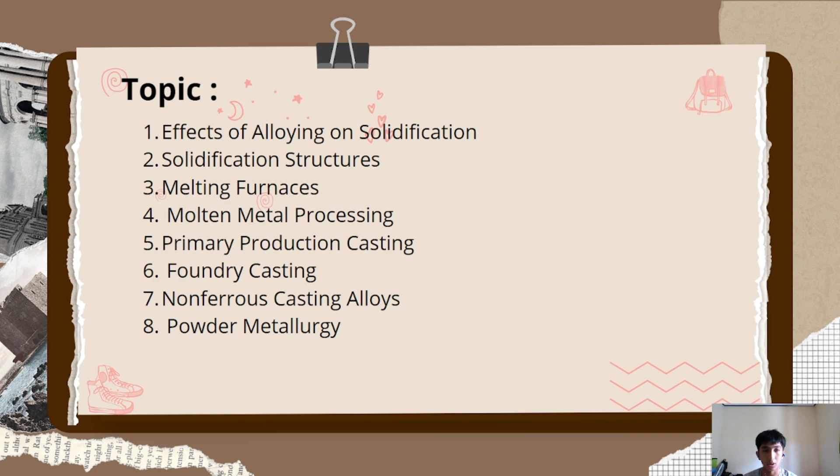Topics: first, effects of alloying on solidification; two, solidification structure; three, melting furnace; four, molten metal processing; five, primary production casting; six, foundry casting; seven, non-ferrous casting alloys; and eight, powder metallurgy.

The manufacture of modern alloys is accomplished using a wide variety of melting, casting, and fabrication techniques. The selection of a specific manufacturing process depends on the alloy system under consideration, the form of the product to be manufactured, the condition in which it must be provided, and the properties it must possess in order to be used effectively in the intended application.

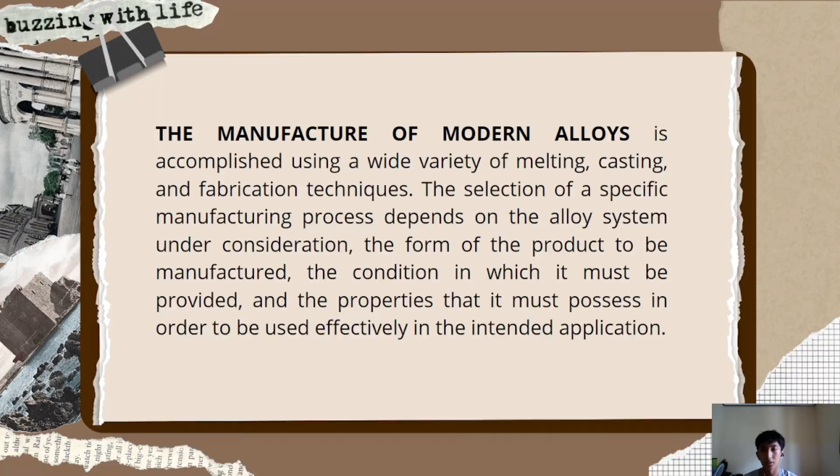Effects of alloying on solidification. Solidification of pure metals: when a pure metal begins to melt, the solid-liquid mixture stays at the melting point temperature until all of the solid has completely melted. The amount of thermal energy needed to complete the transformation from solid to liquid is defined by the latent heat of fusion of the material.

A slightly different cooling curve can be observed when the molten metal includes some minute solid impurities, such as particles of dust or small pieces of the refractory brick used to line the interior of the melt furnace. These impurities promote solidification by serving as nucleation sites such that free moving atoms can anchor themselves onto the impurities. Therefore, only some undercooling or supercooling might occur when the melt includes such impurities.

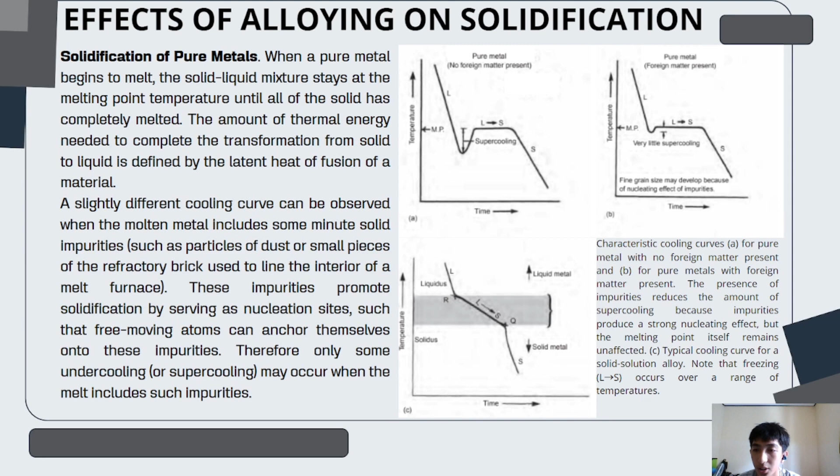Characteristic cooling curves: A for the metal with no foreign material present, and B for pure metal with foreign material present. The presence of impurities should reduce the amount of supercooling because impurities produce a strong nucleating effect, but the melting point itself remains unaffected. C is a typical cooling curve for a solid-solution alloy, noting the freezing occurs across a range of temperatures.

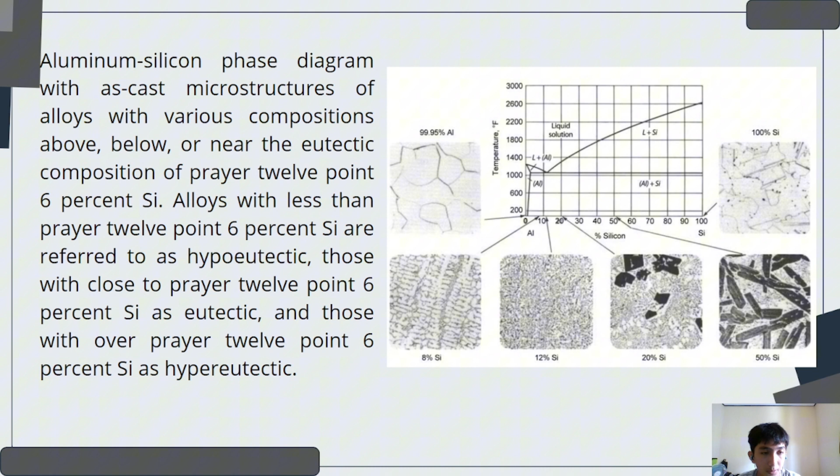Aluminum silicon phase diagram with microstructure of alloys with various compositions above, below, and near the eutectic composition of approximately 12.6% Si. Alloys with less than approximately 12.6% Si are referred to as hypoeutectic, those close to approximately 12.6% Si as eutectic, and those with over approximately 12.6% Si as hypereutectic.

This is a particularly important consideration in aluminum silicon alloys, which have been used for decades in the automotive industry for casting engine blocks. Aluminum silicon alloys are used in this application primarily to reduce overall weight and to improve fuel economy. The freezing range is strongly dependent on the silicon concentration in this alloy.

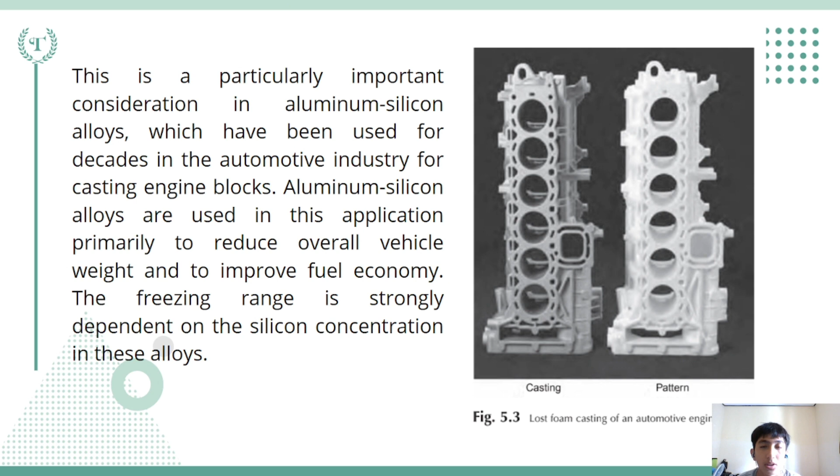Next is solidification structure. The solid-liquid interface during solidification normally exhibits one of three types of crystal growth in the liquid: planar, cellular, or dendritic growth, as shown in the picture.

Dendritic growth is a further manifestation of cellular growth in which the spikes develop side protrusions at still higher undercooling and high growth velocities. The cells grow into rapidly advancing projections, sometimes of complex geometry, as shown in the picture of the effect of undercooling on solidification structure.

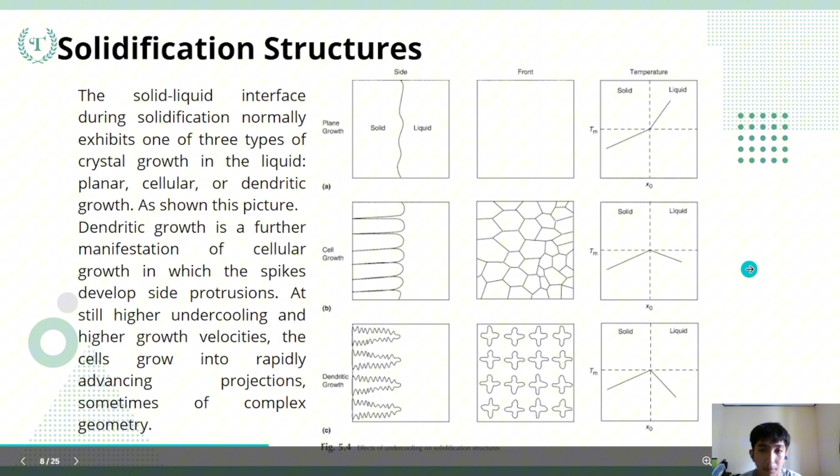Thermal supercooling, cellular growth, as illustrated in the picture, occurs when the advancing planar solid-liquid interface becomes unstable and a small spike appears on the interface that then grows into a cellular type structure. The planar surface becomes unstable because any part of the interface that grows ahead of the remainder enters a region in the liquid that is at a lower temperature.

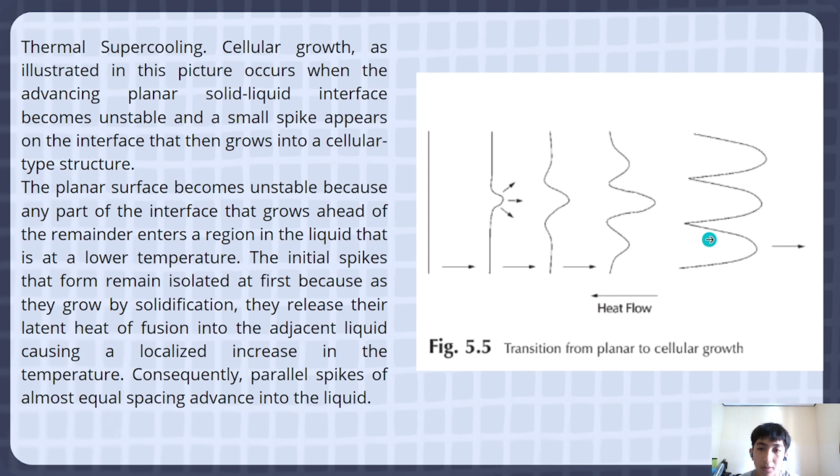The initial spikes that form remain discrete at first because they grow by solidification. They release their latent heat of fusion into the adjacent liquid, causing a localized increase in temperature. Consequently, parallel spikes of almost equal spacing advance into the liquid, as shown in the picture of the transition from planar to cellular growth.

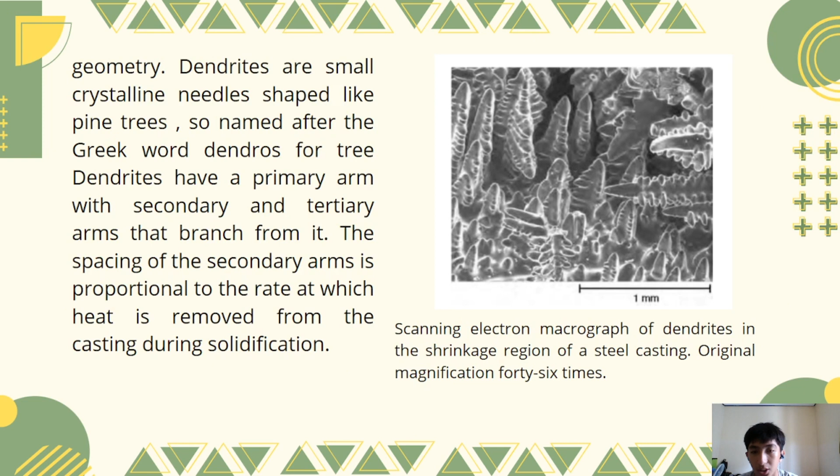As shown in the picture, a scanning electron macrograph of dendrites in the shrinkage region of a steel casting, with original magnification 46 times.

Solidification zones. Metal cast into a mold can have up to 2 or 3 distinct zones, or types of grain growth. A chill zone, a zone containing columnar grains, and a center equiaxed grain zone. However, it should be noted that all three zones do not always occur, as shown in the picture: a chill zone, a zone containing columnar grains, and a center equiaxed grain zone.

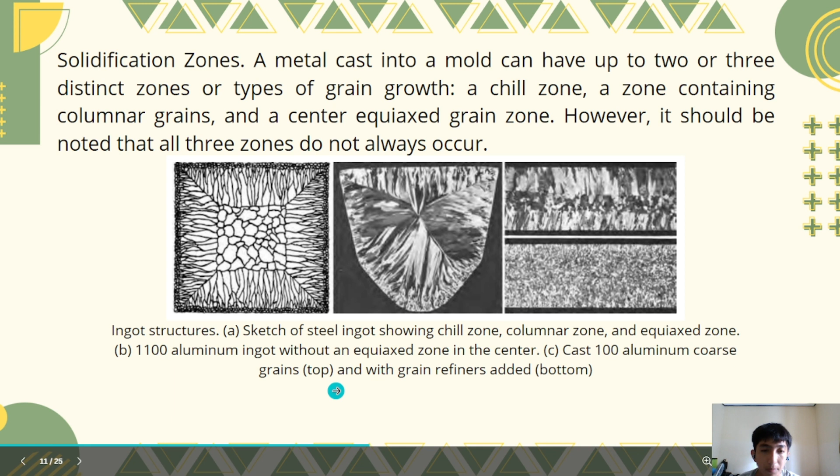Ingot structures. A is a sketch of a steel ingot showing chill zone, columnar zone, and equiaxed zone. B is 1100 aluminum ingot without an equiaxed zone in the center. C is cast 1100 aluminum, coarse grains at top and with grain refiners at the bottom.

Melting furnace. Melting furnaces are industrial devices used to melt various materials such as metals, glass, or ceramics for casting, molding, or other manufacturing processes. The furnaces are crucial in industries like foundries, metalworking, glassmaking, and ceramics production. They come in various types and configurations depending on the specific requirements of the materials being melted and the production process. Here are some common types of melting furnaces.

The first is the electric arc furnace, where the furnace uses electric arcs to generate heat, melting scrap metal or other materials. They are commonly used in steel making and can achieve high temperatures quickly.

They are commonly used in steel making and can achieve high temperatures quickly. Induction furnaces use electromagnetic induction to heat and melt metals. They are efficient and commonly used for melting ferrous and non-ferrous metals like iron, steel, aluminum, and copper.

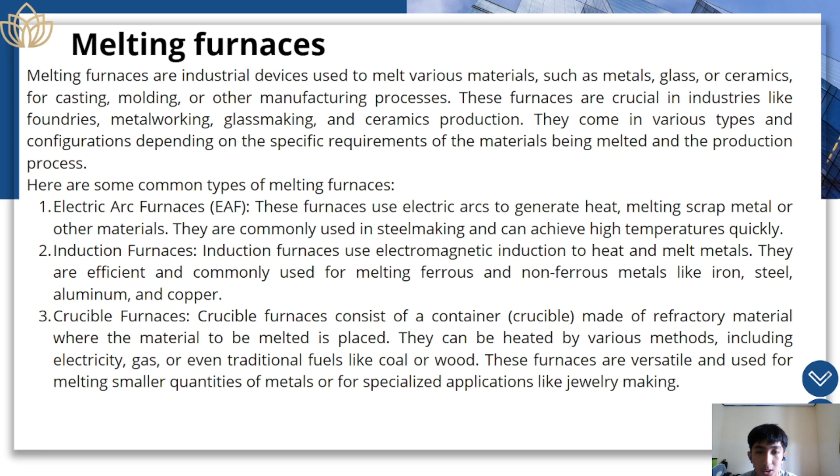Crucible furnace. A crucible furnace consists of a container or crucible made of refractory material where the material to be melted is placed. They can be heated by various methods, including electricity, gas, or even traditional fuels like coal or wood. These furnaces are used for melting smaller quantities of metals or for specialized applications like jewelry making.

Cupola furnace. Cupola furnaces are used primarily in foundries for melting iron. They work by burning coke, a type of coal, to produce heat, which melts the iron and other additives.

Blast furnace. Blast furnaces are vertical furnaces used primarily for smelting iron ore to produce pig iron, which is then further processed into steel. They operate by continuously feeding iron ore, coke, and limestone into the top of the furnace where a blast of hot air is blown in from the bottom.

Gas furnace. Gas furnaces use natural gas or propane as a fuel source to generate heat for melting metals. They are commonly used in small-scale operations or where electricity is not readily available.

Oil-fired furnace. Oil-fired furnaces use oil as a heat source for melting metals. They are less common than electric or gas furnaces but can be used in situations where other fuel sources are preferred or more readily available. The choice of a melting furnace depends on factors such as the type and quantity of material to be melted, energy efficiency requirements, cost considerations, and environmental regulations.

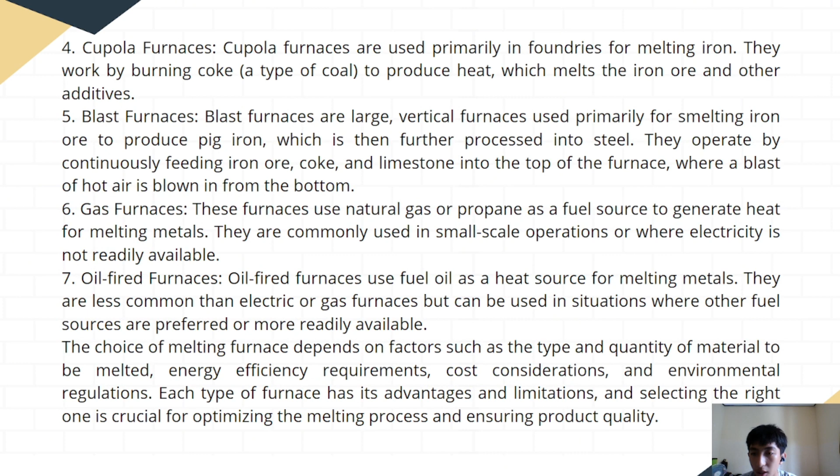Each type of furnace has its advantages and limits, and selecting the right one is crucial for optimizing the melting process and assuring product quality.

Molten metal processing. Molten metal is processed and handled in various ways depending on the alloys and melting practices that are used. Melting is a basic way of combining elements for the purpose of alloying, and the overall chemical composition of the molten alloy must be carefully controlled and processed before casting can take place.

Fluxing. Fluxing of molten metal is often the first step in obtaining a clean melt. Fluxing is a term commonly used in foundries and melting departments that refers to molten metal treatments from the addition of reactive chemical compounds or inert gases.

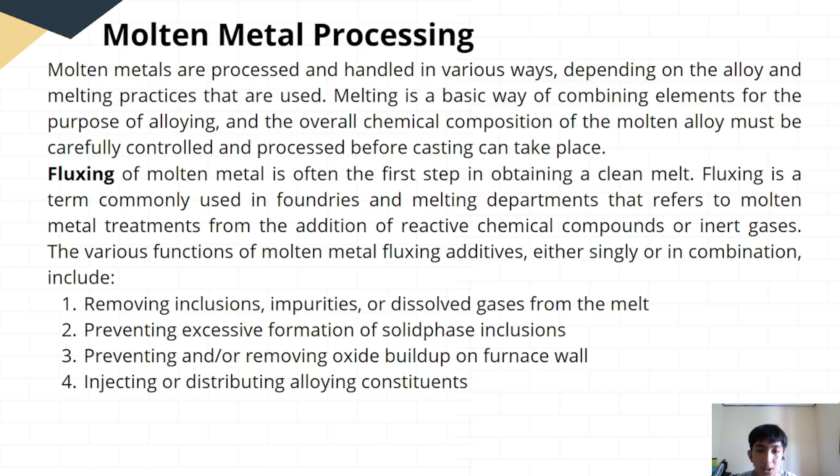The various functions of molten metal fluxing additives, either singly or in combination, include: first, removing inclusion impurities or dissolved gases from the melt; second, preventing excessive formation of solid phase inclusions; third, preventing or removing oxide buildup on furnace walls; and fourth, injecting or distributing alloy constituents.

The type of flux depends on the composition of the melt. In brass, bronze, and iron and steel making, for example, the function of fluxing is twofold: first, to render the high-melting refractory oxide impurities fusible and separable from the molten metal, and second, to provide a medium with which the impurity elements or compounds will combine in preference to the metal.

In particular, fluxing is used extensively in controlling dross formation and removing oxide from aluminum melts in melting furnaces. The basic types of aluminum fluxes are: first, cover fluxes, designed to produce a barrier or blanket on the surface of molten aluminum.

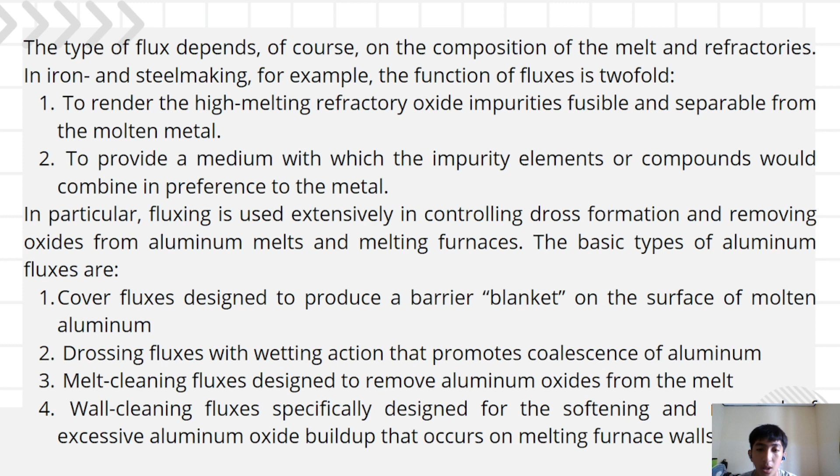Second, drossing fluxes with a wetting action that promotes coalescence of aluminum. Third, melt cleaning fluxes designed to remove aluminum oxides from the melt. And fourth, wall cleaning fluxes specifically designed for the softening and removal of excessive aluminum oxide buildup and crust on melting furnace walls.

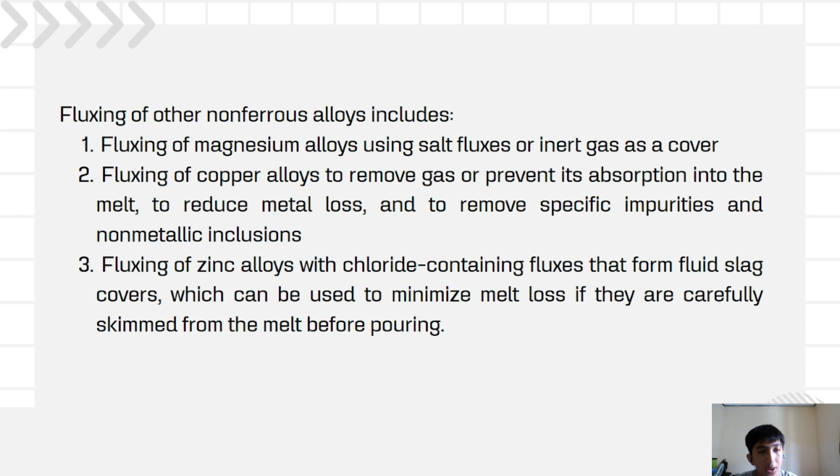Fluxing of other non-ferrous alloys includes: first, fluxing of magnesium alloys using salt fluxes or inert gas as a cover; second, fluxing of copper alloys to remove gas or prevent its absorption into the melt, to reduce metal loss, and to remove specific impurities and non-metallic inclusions; third, fluxing zinc alloys, which use chloride-containing fluxes that form fluid covers, which can be used to minimize melt loss if they are carefully skimmed from the melt before pouring.

Primary production casting. Foundries also require the use of ingots that can be remelted, sometimes called pig ingots, to provide specification-compliant composition. Other defects that may form in an ingot during casting and solidification that could result in cracking during forging, rolling, or extruding include metallic impurities, non-metallic impurities, slag, dross, and flux inclusions, inferior microstructure, segregation, surface cracks, and internal cooling cracks.

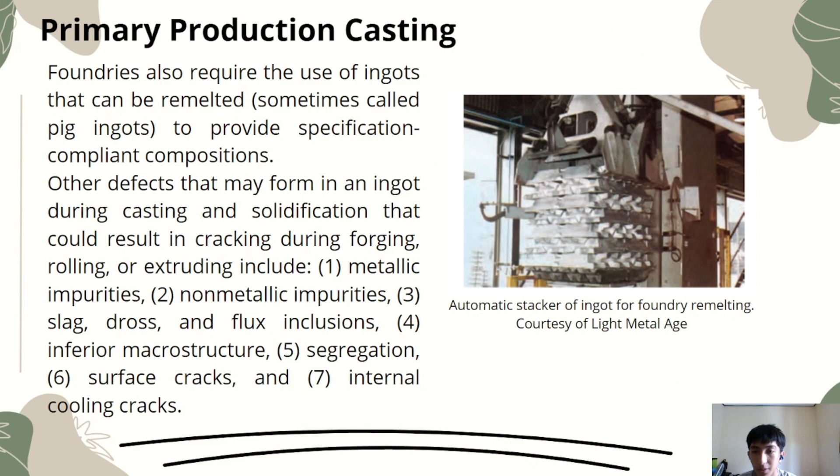Next is static ingot casting. Several ingot casting processes have been designed and developed for downstream manufacturing process. The most common is static ingot casting, where molten metal is poured into a vertical open-ended mold.

Continuous casting process may be defined as the continuous solidification and withdrawal of product from an open-ended shaping mold. The solidified ingot may be handled in several ways. For instance, while the ingot is growing in length, it can be directed into a holding pit. At the appropriate time, the continuous caster can be shut down and a section of the ingot can be removed from the holding pit. Then the process can be restarted.

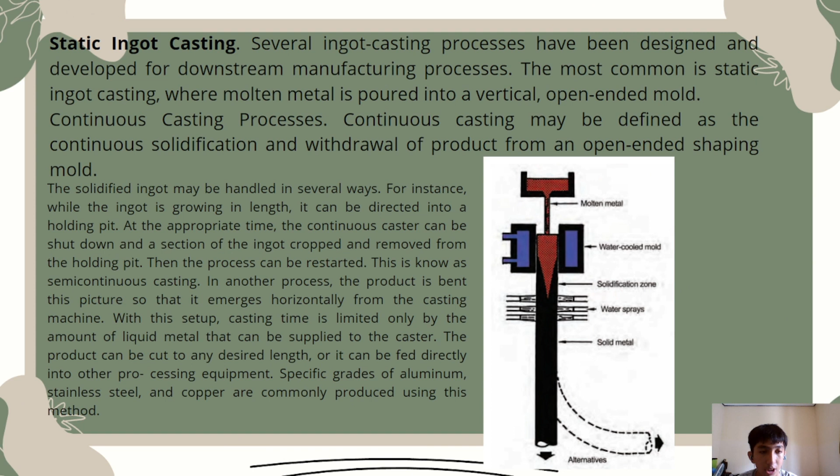This is known as semi-continuous casting. In another process, the product emerges horizontally from the casting machine. With this setup, casting time is limited only by the amount of liquid metal that can be supplied to the caster. The product can be cut to any desired length, or fed directly into other processing equipment. Specific grades of aluminum, stainless steel, and copper are commonly produced using this method.

Foundry casting. Casting in metals can be divided into three broad categories. The first is casting with expendable molds, such as sand, plaster, ceramic, and graphite molding. Second is casting with reusable or permanent molds. And third is casting with reusable or permanent molds with high pressure metal injection of the metal into the mold, including die casting, squeeze casting, and semi-solid processing.

Casting with expendable molds provides tremendous freedom of design in terms of size, shape, and product quality. Expendable mold methods are classified further as either expendable molds with permanent patterns, or expendable molds with expendable patterns.

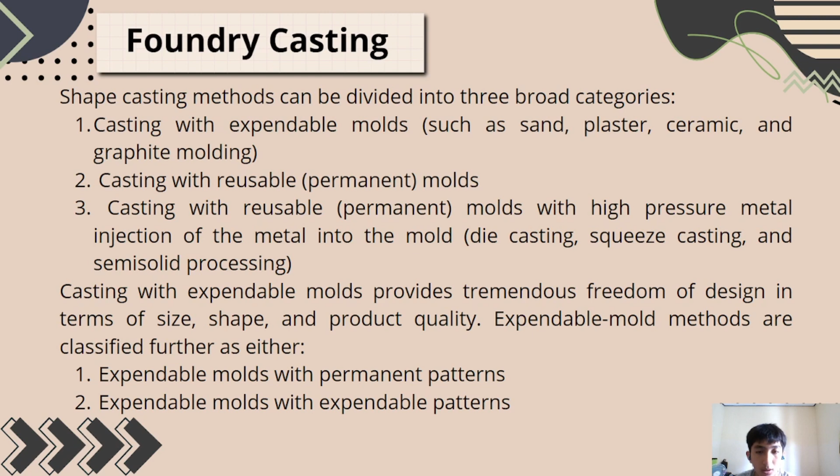When permanent patterns are used, the mold must be separable into two or more parts in order to permit withdrawal of the permanent pattern. The permanent pattern is the negative or mirror image of the part to be cast, and the patterns are used to form the cavity for the cope, or top, and drag, or bottom section of the mold. After the patterns are removed, the cope and drag sections are sealed together for casting.

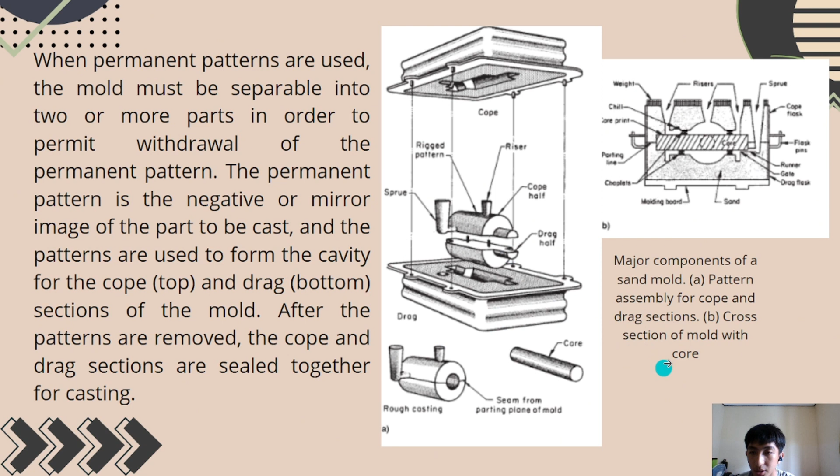Like the picture shown here, this illustrates a major component of a sand mold. A is the pattern assembly for the cope and drag section, and B is the cross section of the mold.

Non-ferrous casting alloys. Aluminum casting alloys are the most versatile of all common foundry alloys and generally have the highest castability ratings as casting materials. Aluminum alloys have several favorable characteristics.

First is good fluidity for filling thin sections. Second is low liquidus temperatures relative to that required for many other metals. Third is rapid heat transfer from the molten aluminum to the mold, providing shorter casting cycles. Fourth, hydrogen is the only gas with appreciable solubility in aluminum and its alloys, and hydrogen solubility in aluminum can be readily controlled by processing methods.

Fifth, many aluminum alloys are relatively free from hot-short cracking and tearing tendencies. Sixth, chemical stability. And seventh, good as-cast surface finish with a lustrous surface that has few or no blemishes.

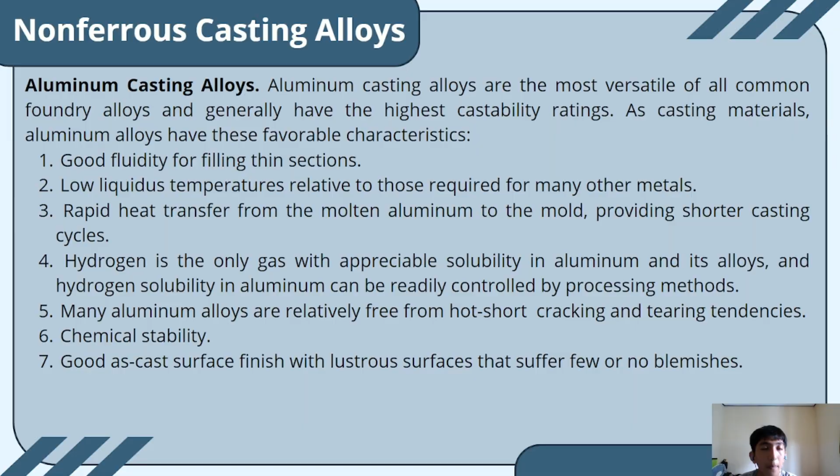Next is magnesium casting alloys. Magnesium casting alloys of all types have found use in many commercial applications, especially where lightness and rigidity are a major advantage, such as chainsaw bodies, computer components, camera bodies, and certain portable tools and equipment. Magnesium alloy sand castings are used extensively in aerospace components. Molten magnesium alloys have a very low viscosity, allowing the material to flow long distances and through narrow mold cavities.

Zinc casting alloys. Die casting is the process most often used for shaping zinc alloy. Sand casting, permanent mold casting, and continuous casting of zinc alloys are also practiced, but account for less than 10% of zinc casting tonnage. All processes are based on the same family of alloys with special compositions of zinc casting alloys.

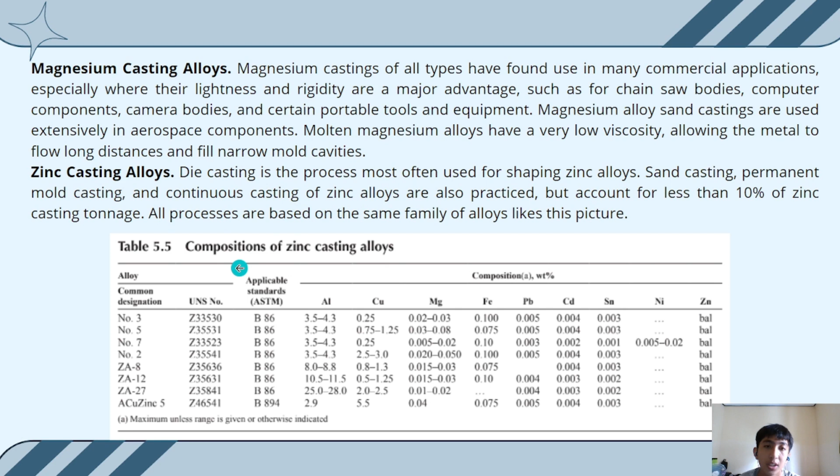Powder metallurgy. The general types of atomization processes encompass a number of industrial and research methods. Industrial methods include two-fluid atomization, where a liquid metal is broken up into droplets by impingement of high-pressure jets of gas, water, or oil, as shown in picture 28A and B.

Second, centrifugal atomization, where a liquid stream is broken into droplets by the centrifugal force of a rotating cup or electrode, as shown in this picture 28C.

Next, vacuum or soluble-gas atomization, where molten metal is super saturated with a gas that causes atomization of the metal in vacuum, as shown in figure 28D. Next, ultrasonic atomization, where a liquid metal film is agitated by ultrasonic vibration, shown in picture 28E.

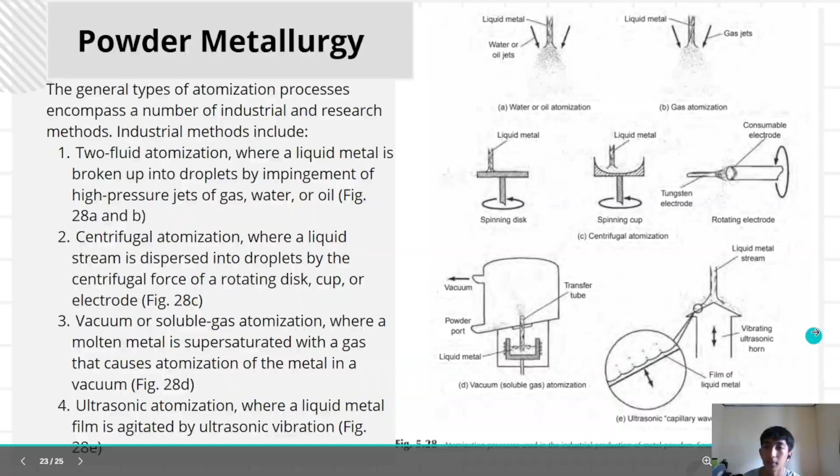Next is gas atomization. Gas atomization processes generally produce powder particles that differ from those produced by water atomization process in terms of their geometry and surface chemistry. Gas atomized powders are typically more spherical in geometry and possess a lower surface oxygen content than their water atomized counterparts.

Gas atomization differs from water atomization in several aspects, rather than being determined by the properties of the medium as in water atomization. It is found that the gas to metal ratio is the dominant factor in controlling powder particle size, with median particle size being related inversely to the square root of the gas to metal ratio.

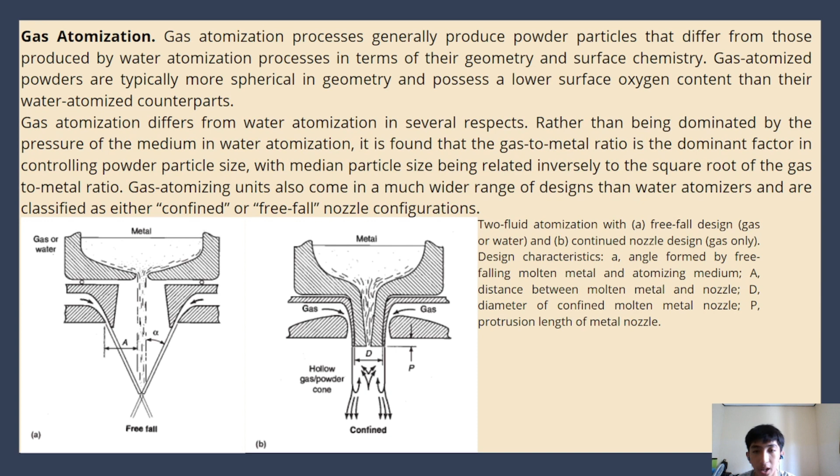Gas atomizing nozzles also come in a much wider variety of designs than water atomizers, and are classified as either confined or free-fall nozzle configurations. As shown in this picture of two-fluid atomization, A is the free-fall design using gas or water, and B is the confined nozzle design using gas only. Design characteristics: A is the angle formed by the free-falling molten metal and the atomizing medium; A is the distance between molten metal and nozzle; D is the diameter of the confined molten metal nozzle; and P is the protrusion length of the metal nozzle.